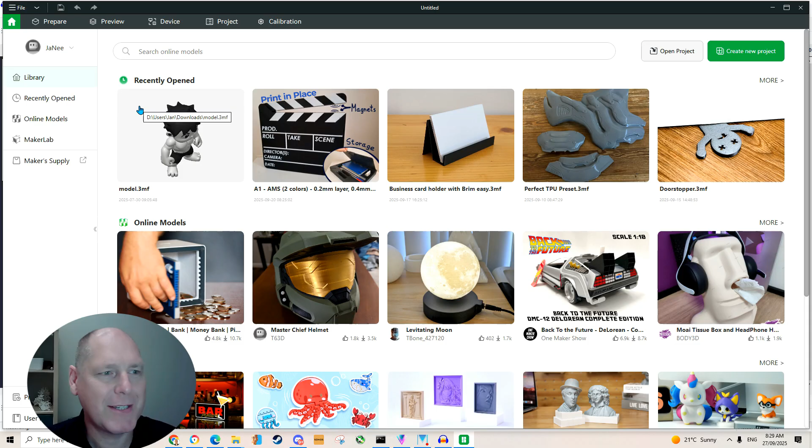In this video I'm going to show you how to basically create a smooth surface on top of an object that is printing at a funny angle.

So I'm going to take this little dead character. Now this is not mine, and I want to just thank the guy who made it. And very simply, if we slice this, you'll see that that's obviously done at an angle.

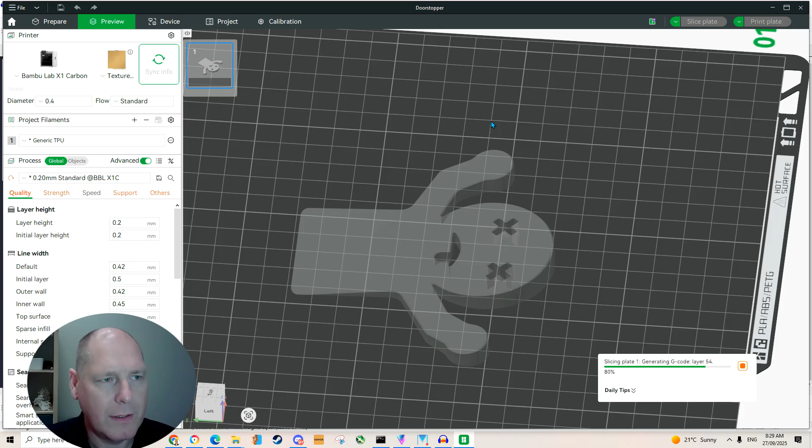Now sometimes you've got an object that's nice and flat at the top, and then it's got a little piece that's not printing nicely. So I'm going to show you in this video how I can take this object and actually make it a nice smooth top.

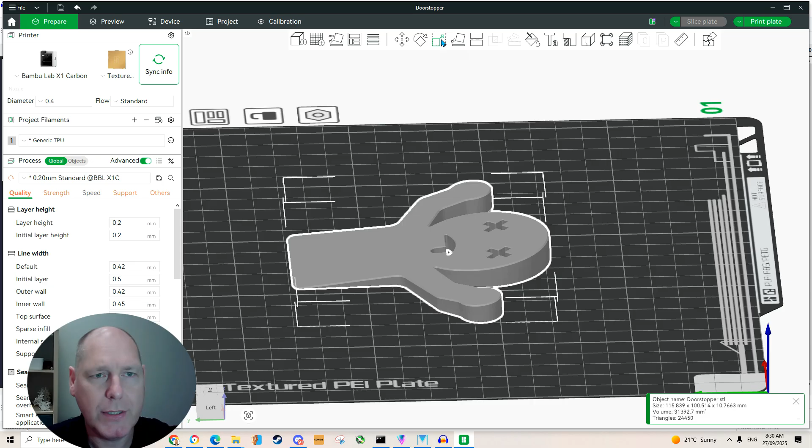So I'm going to start by just preparing it. We're going to select the item and just enlarge it slightly, just in one direction like that there. Yeah, that'll do for now.

Now we want to create a nice flat object. So how do we do that? We're going to add a primitive. We click on the object, and we're going to add a negative part. We're going to create a cube.

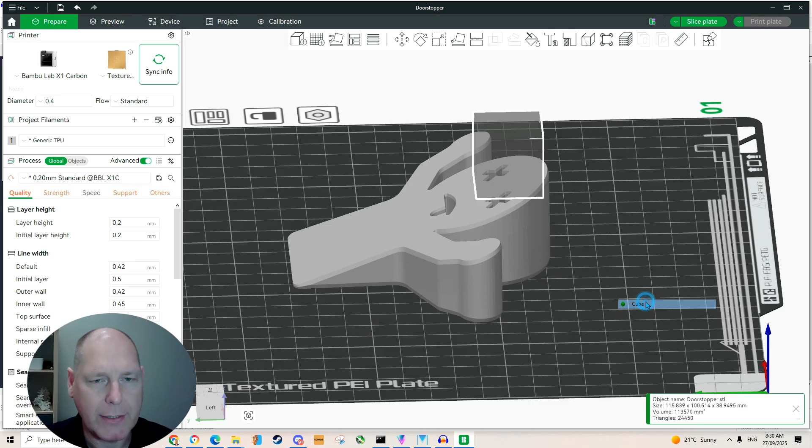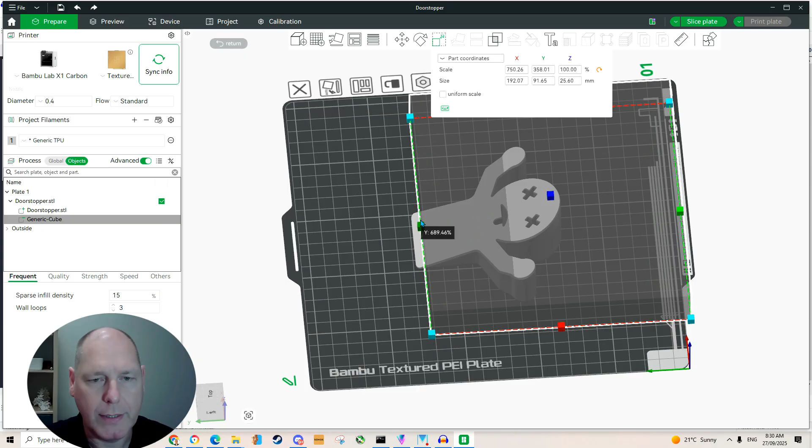Now what we need to do is move that cube around to make it nice and flat. So let's start by resizing the cube. We're going to make it a bit bigger in that direction, bigger in that direction, and just flip this around. Right, so we've got our cube now like that.

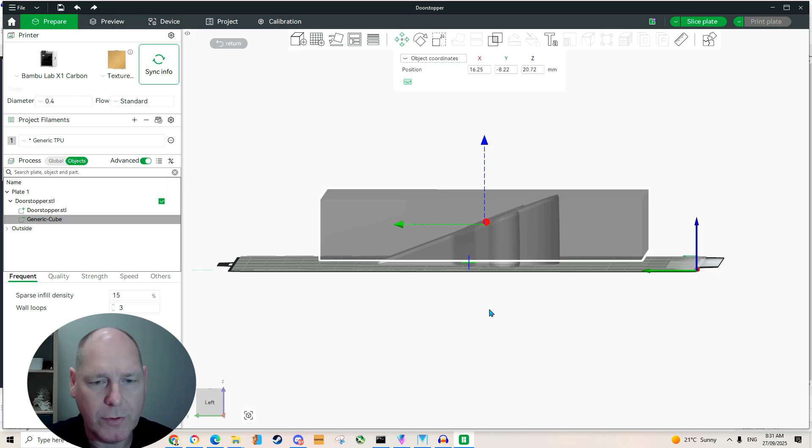And what we want to do now is just make it a bit higher as well, just so that we can cover this whole little image. Okay, so we are now going to move it up in that direction, and you'll see that now we've got a nice flat object there.

Now we do want to make it as flat as we possibly can, so let's just move that down, maybe even down to as low as one layer, just like that. Now again, the object's not quite big enough, we need to scale that up. So that's our Z that we're going to be doing, so let's just make that 50.

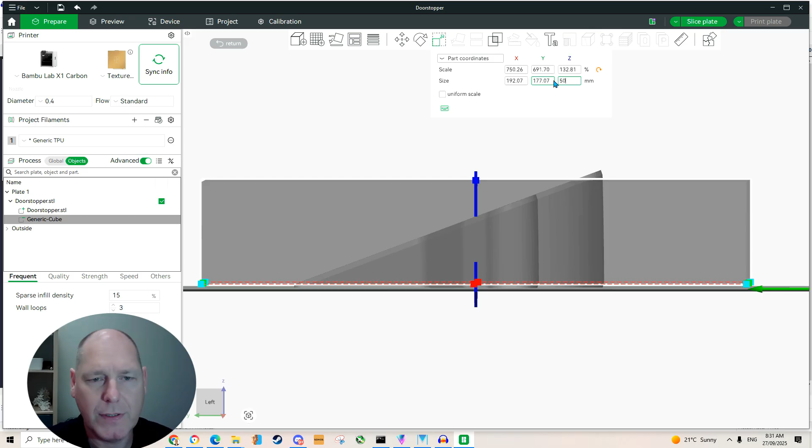Let's just move it again, zoom in nicely at the bottom there so we can see. Right, great. So now we've added the negative part.

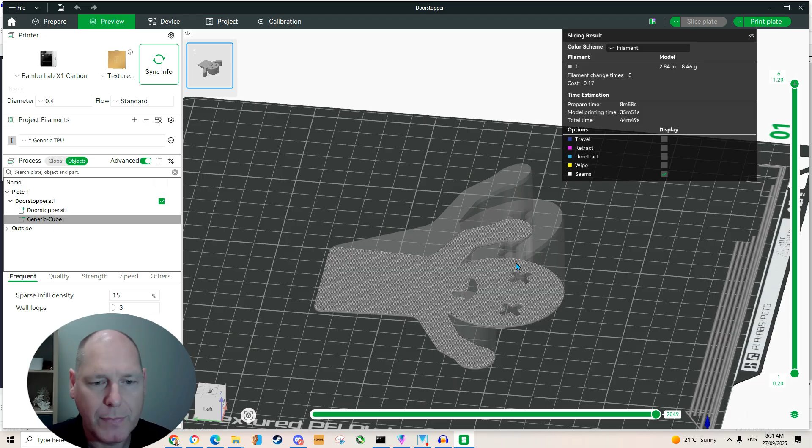So if we slice it now again, what's going to happen? We're only going to have a little flat dead man, which is great. Okay, right, so that's one way of doing it. You can do it with a negative part like that.

Another way of doing it that's probably going to work better in this situation is that firstly, let's just get rid of the negative part. What we can do is literally just split the object. So we select the object, we go split, we need to then just move this around.

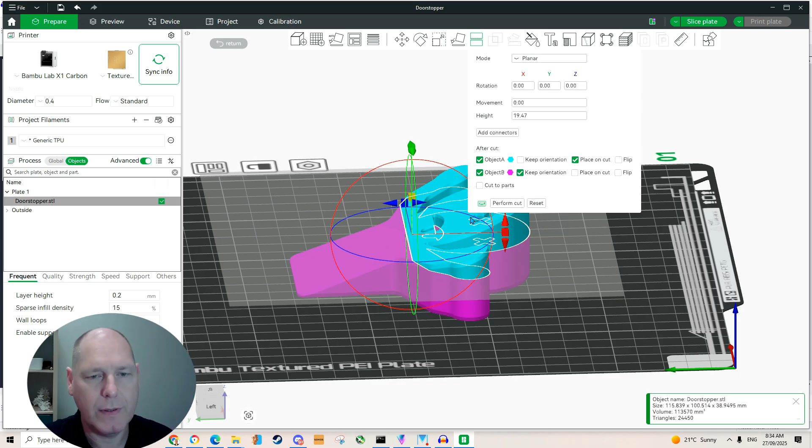Now you can see it's already in the right horizontal plane, so we're just going to move it all the way down to roughly about there. Great, we say perform cut.

So now we're going to end up with two objects. We'll just give Windows a chance to actually repair that because it's got a few holes in it.

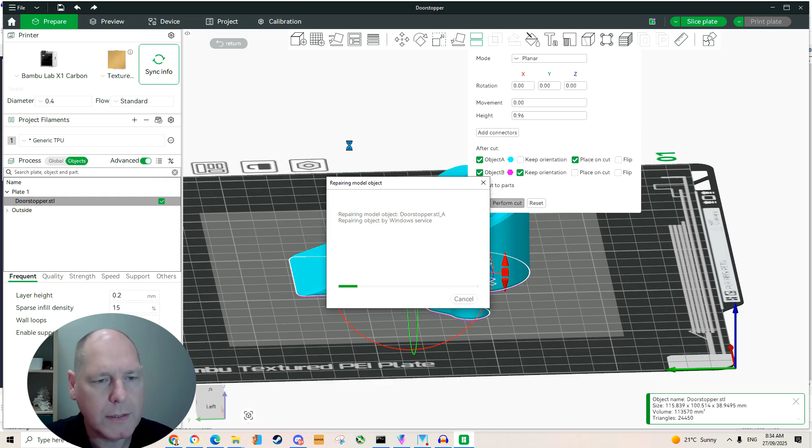Right, so simply what we're going to do then is we're just going to select the one door stopper. We want to get rid of that one, delete it. Now we're going to just simply increase the size on this. We're going to increase the Z to how thick we want it.

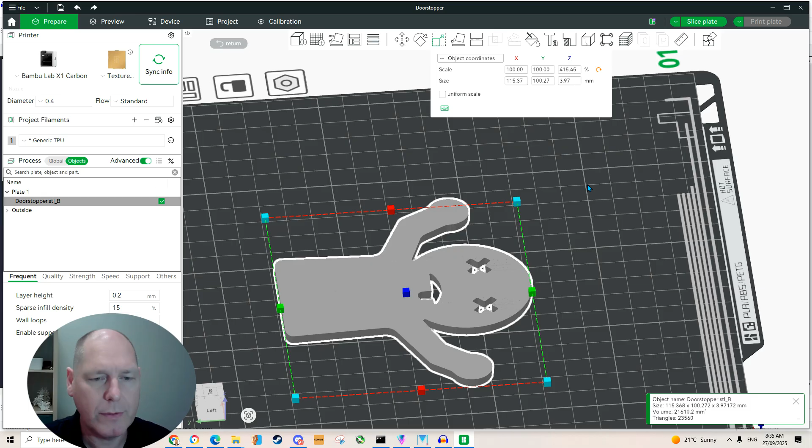So that's another way of doing the same thing. You can either do it with a negative block, or you can just cut it. Now when we slice it, you can see we get a nice even surface at the top. We don't have any stepping or anything like that. Hope it makes sense.